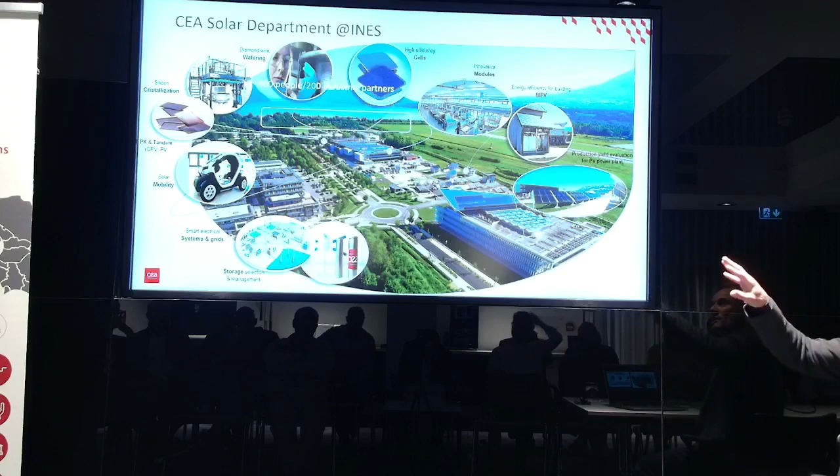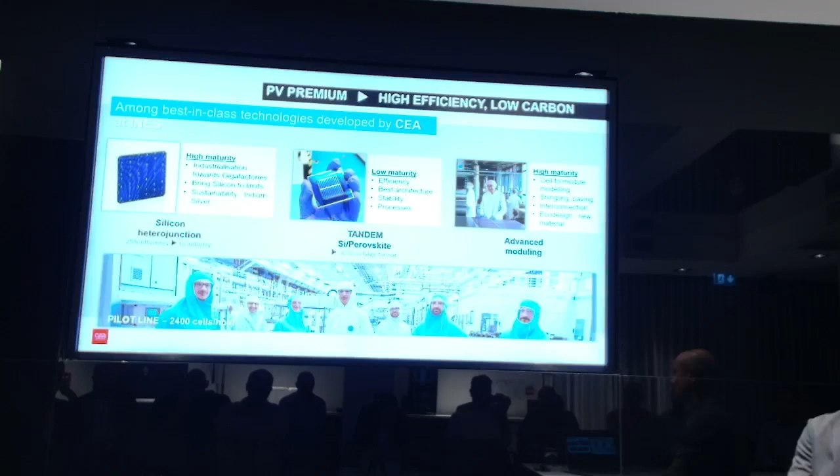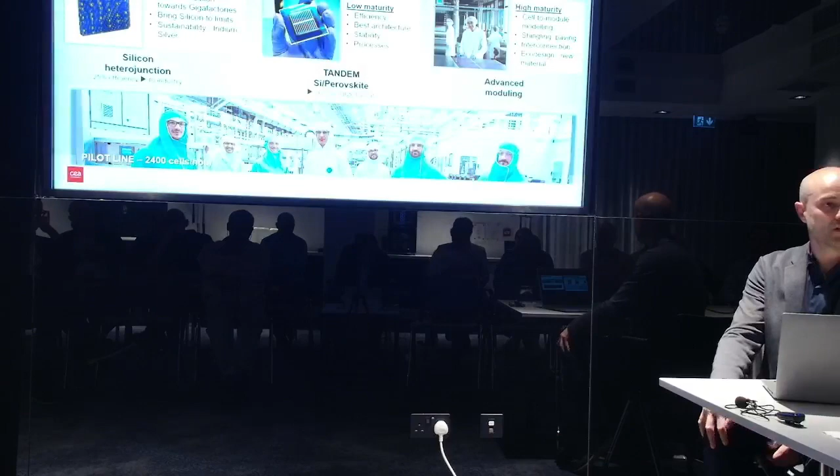So our first activity is to develop premium module technology with manufacturers for large PV systems. Here, quality, performance, and price are essential. One of our partners is Enel Green Power, Italian, which we support in its PV module manufacturing plant in Sicily, in Catania. It's an old ST Microelectronics site. There are big goals for manufacturing, trying to produce 5 gigawatts of modules in Sicily. The goal is to participate in the reindustrialization of Europe in the field of solar panel manufacturing.

Right now, 80% of modules come from China, and the rest from Asia. And we need a lot, so it's a big deal to do this. Right now, there is big dumping from China because we have a lot of modules in the harbor, so there are more modules, and there is an economic war between the United States and China, but who will make modules at which price? So it's difficult for all, so we have to close a little bit, maybe, the political things.

Today, the drop in cost and the durability of PV have always made it a very relevant technology for applications, like historically for satellites. There is no component in movement, and it is very light. So the point here is not the cost. I mean, always the cost, but less the cost. Very light, robust modules are the key. And here, the function rendered by the module is essential.

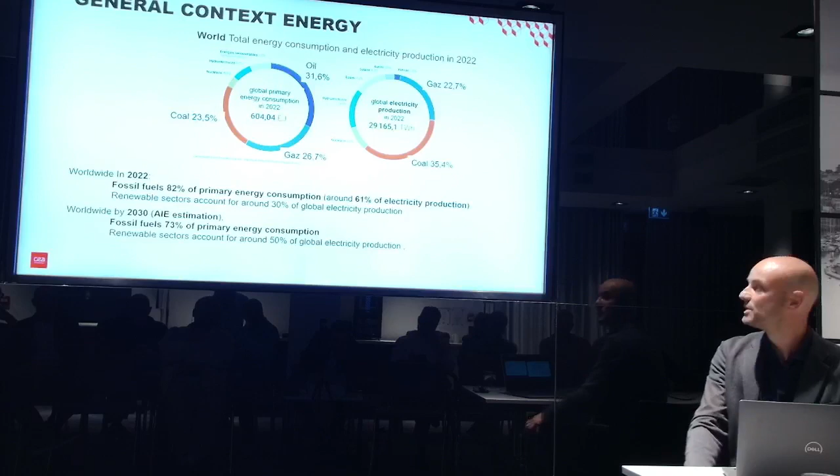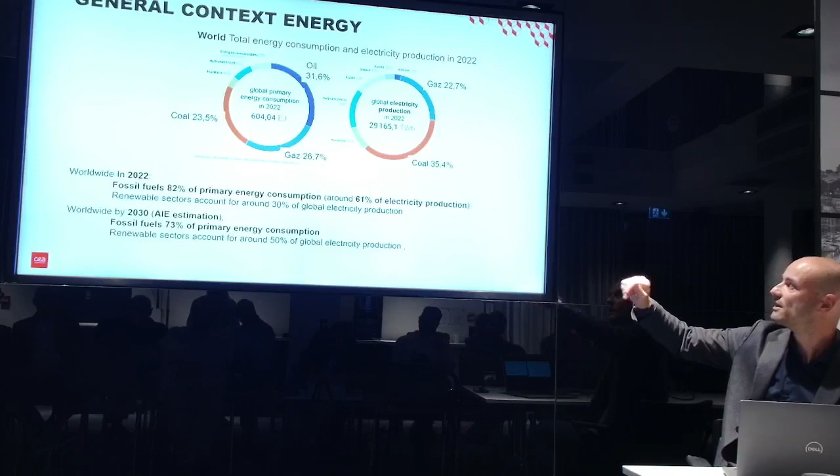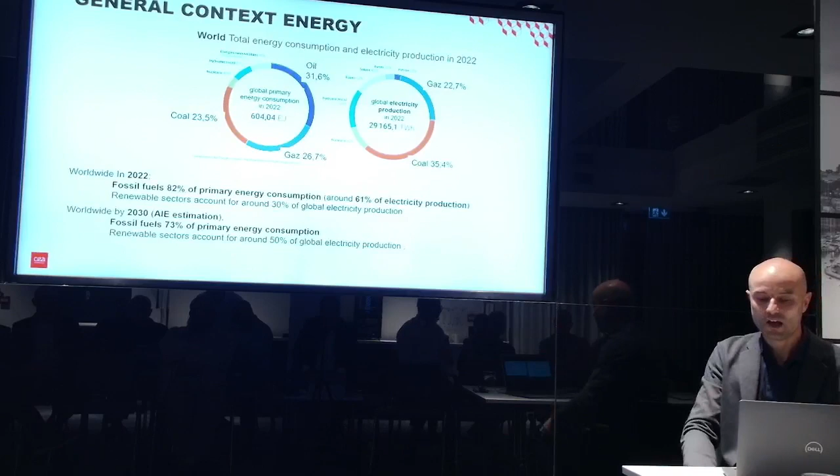So some general context. First of all, we know that fossil fuels are the main cause of global warming. It's known, and today they still represent the majority of our energy. On the left, you have all we need in energy, including transport. On the right, only electricity production. In both, it mainly comes from fossil fuels: coal, gas, and also petrol, oil for transport. So decarbonization requires reducing the use of these fossil fuels, and renewables will contribute enormously to this effort.

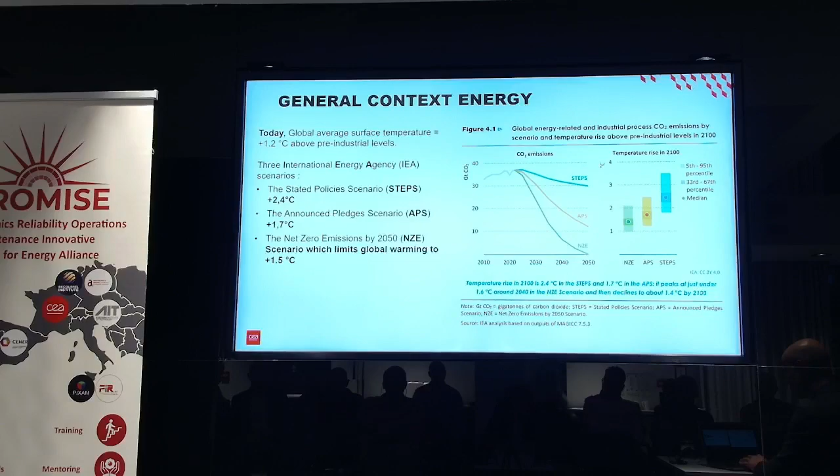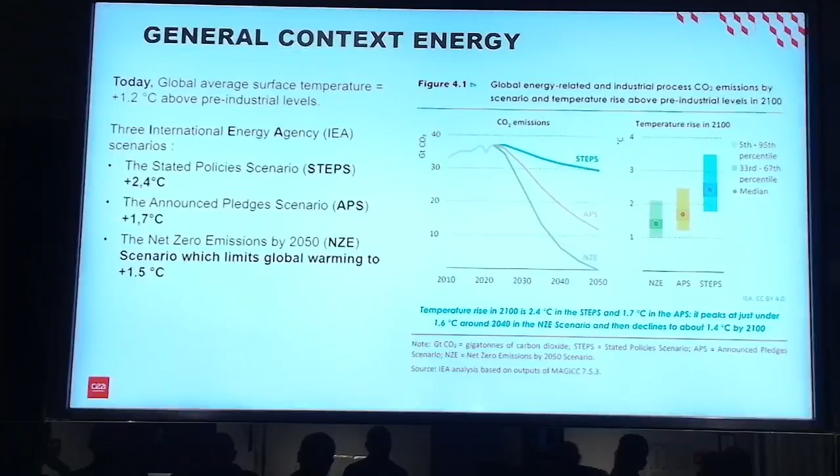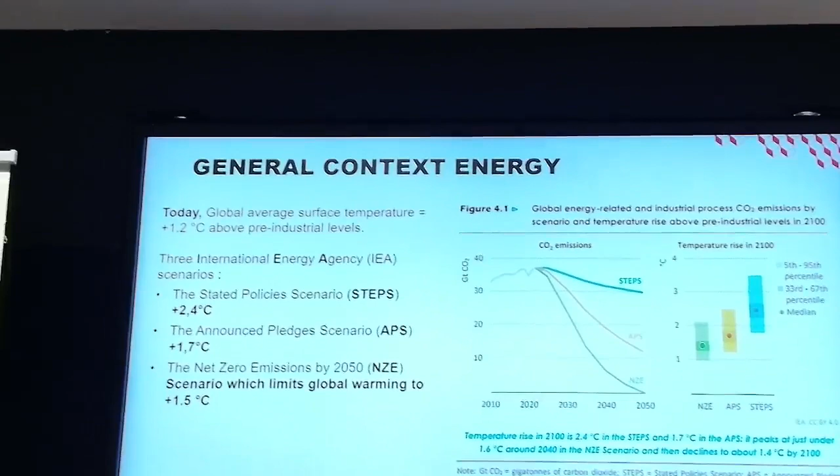So I would like to focus on this: the International Energy Agency proposes 3 scenarios depending on state declarations and objectives to limit temperature increase. First, the Stated Policies Scenario, STEPS, provides an outlook based on the latest policy settings, including energy, climate, and related industry policies. This scenario will limit warming in 2100 to 2.4 degrees.

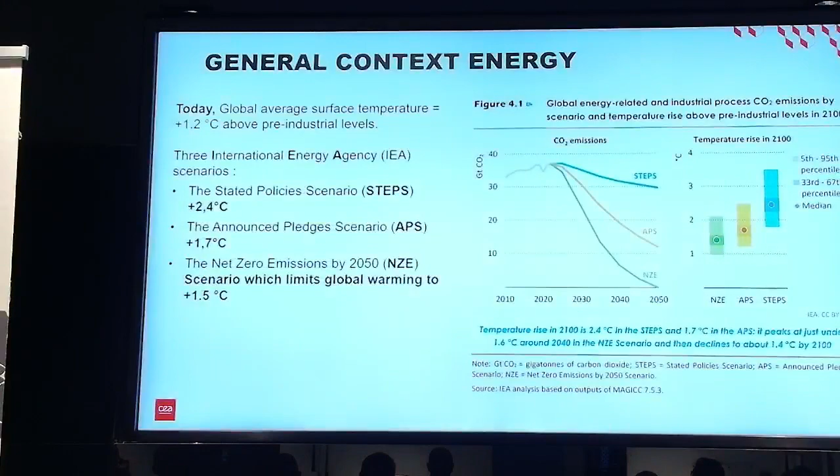The other scenario is the Announced Pledges Scenario, APS. It assumes all national energy and climate targets made by governments are met in full and on time. This scenario will limit warming in 2100 to 1.7 degrees. So it's not enough again, and much additional progress is still required to meet the objective of net zero emissions in 2050, which limits global warming to 1.5 degrees.

So here we can see it's 2.4 degrees, but there is some uncertainty. There are a lot of publications on the difference between 1.5 degrees, etc. It's huge.

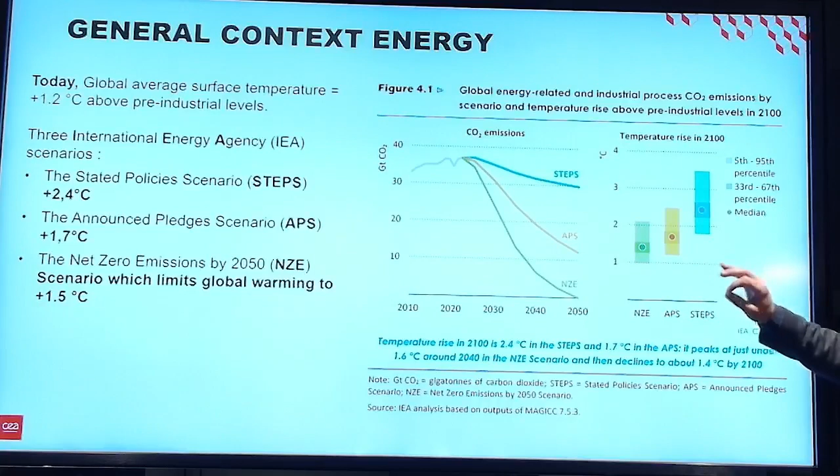In all scenarios proposed by the IEA, you have here the three scenarios, electricity consumption increases. We need more electricity. And why? Because we use it for transport. The STEPS scenario, the most conservative one, estimates that the number of electric vehicles will be multiplied by 2.5 in 2030. So we need more electricity for that. And of course, there is also a part linked to the increase of population and standard of living.

We see that in all scenarios proposed by the IEA, even the least ambitious, PV plays a major role. Here. So we know very well how to do the main part of the objective: ramping electrification, tripling renewable energy capacity.

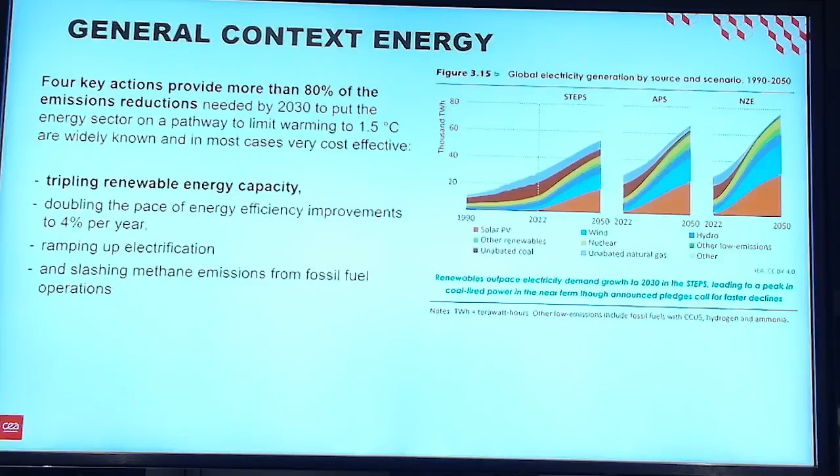Here, maybe, why is solar PV important? Solar PV is very modular. It can be manufactured in large plants with economies of scale, and you can deploy it in very small quantities. In PV, there is no scale effect. So you can address a range of applications from small to very large plants. It's very different from wind turbines, for instance.

Today, utility-scale solar PV is cheaper than the other options for new electricity generation. And rooftop solar is also growing faster due to rising electricity prices. And also the technology is mature right now, and we don't necessarily have time to wait 10, 20 years.

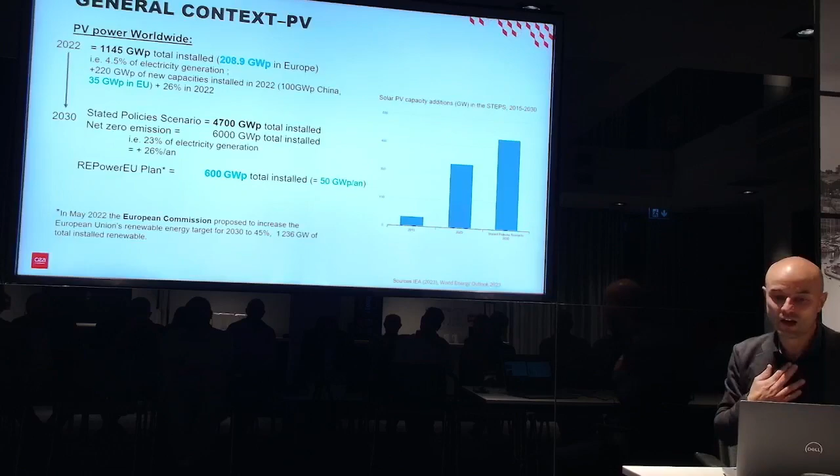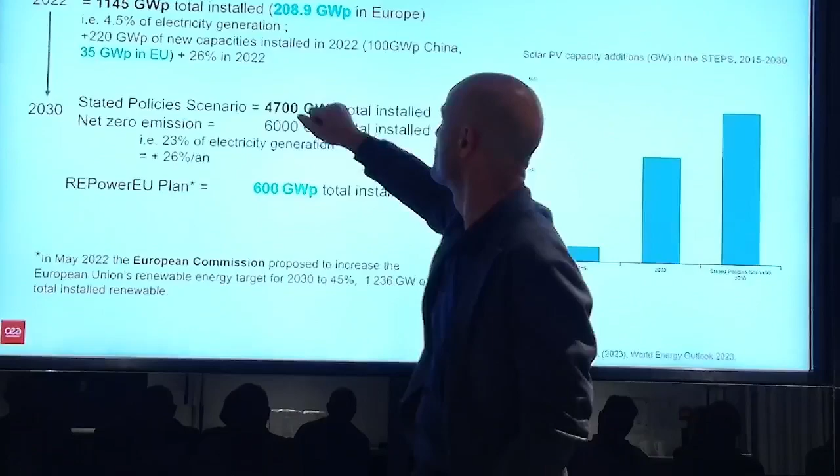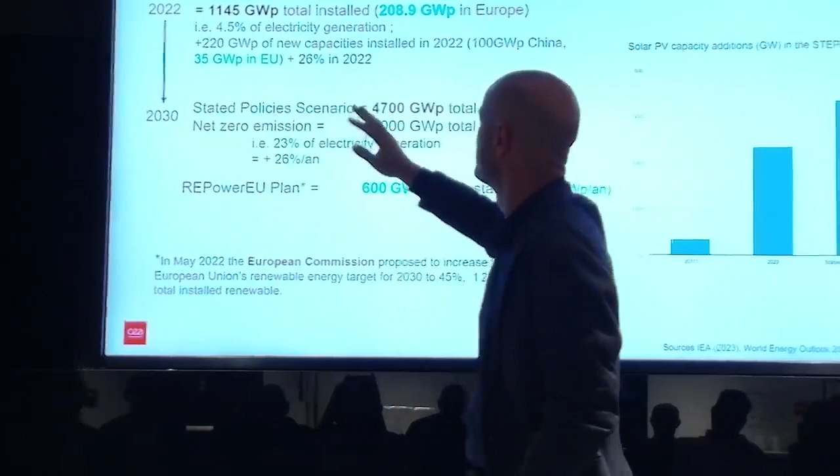So where we are today, some figures about 2022 and 2030. We have to go from there to there. And here it's conservative. In Europe, right now we are here, and in 2022 we added 35 gigawatts in Europe. The world is there. So we could achieve this objective, but it needs to be constant. Each year plus 26%.

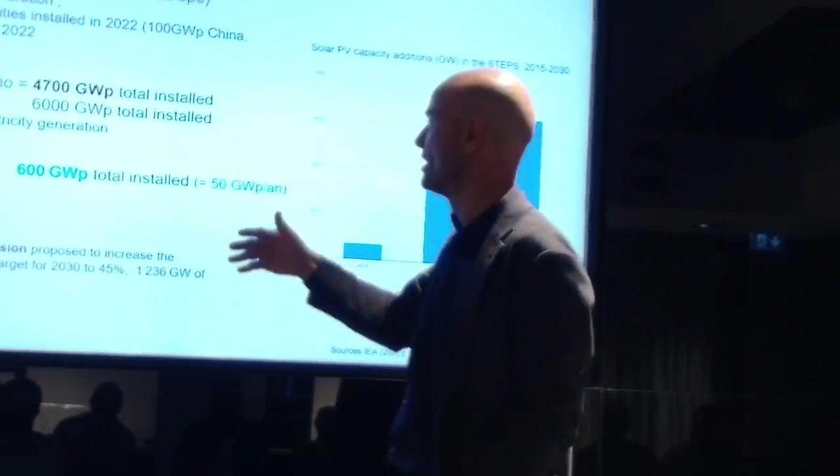So here in Europe, it's 50 gigawatts per year. This one is the conservative one. Each year we have to put in more and more. So we can do this, but there are some difficulties. I want to present this here.

And PV production is identified as an important lever of decarbonization, but the deployment of these technologies at different stages is important.

So renewables are said to contribute 80% of new power capacity to 2030 in the STEPS scenario, with solar PV alone accounting for half of the objective. In Europe, we have to pass from 200 to 600 in 7-8 years.

And the point is, solar energy is abundant on Earth, but its density is quite low. So therefore it requires a fairly large surface area. These huge surfaces must avoid impacting the environment as much as possible, and also human uses like agriculture.

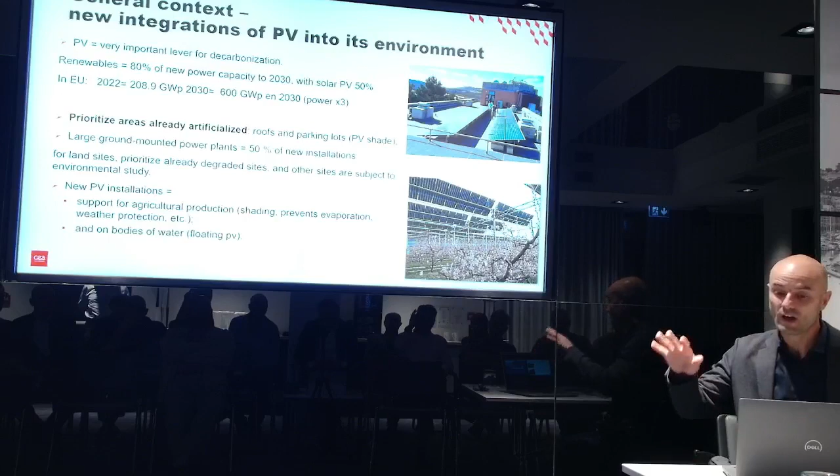And to do this, it's particularly important to prioritize surfaces that have already been artificialized, such as roofs, parking lots, PV shades, for instance. And for land sites, already degraded sites are prioritized, like quarries or things like that. And other sites are subject to environmental study.

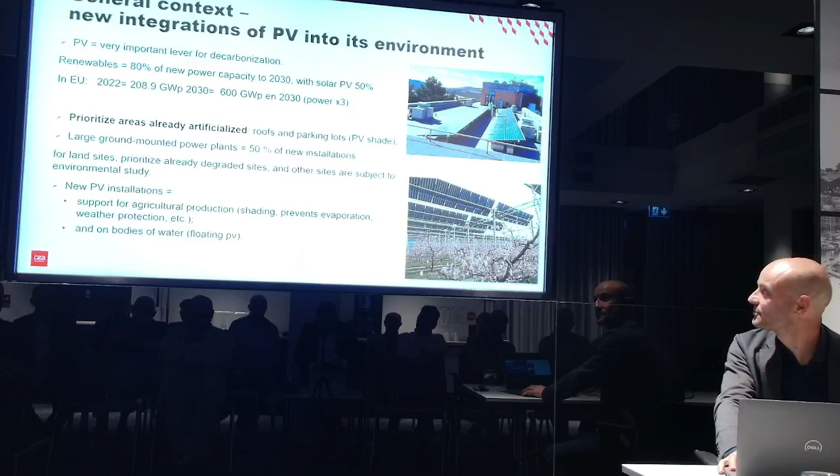More recently, new PV installations have also been developed, used as support for agricultural production, shading to avoid evaporation, weather protection, etc. There are a lot of demonstrators and tests in France or in Germany, and also on bodies of water: floating PV. You can see what's happening. Here is in Malta.

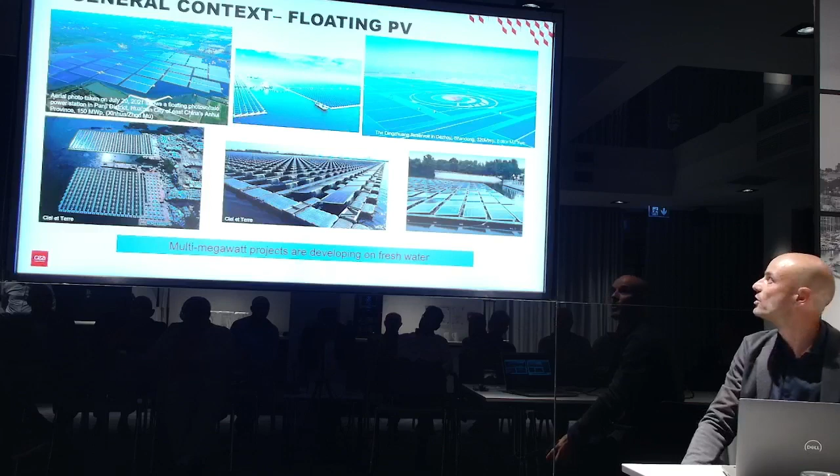So today, freshwater systems, like we can see, are mature, and huge power plants have already been built, mainly in Asia. Floating solar technology is now being developed over large areas with multi-megawatt systems. Here we can see a 300 megawatt peak floating system in China.

So this technology is quite new, and there is sometimes a lack of data on projects, and better knowledge or more precise data would make it possible to optimize operation and profitability of these projects. Here is an example of one project in France on a quarry lake. My laboratory is working with this partner to optimize the site production and integrate feedback on this upcoming floating power plant. So we have a lot of sensors in there, and we can work on different points of the system.

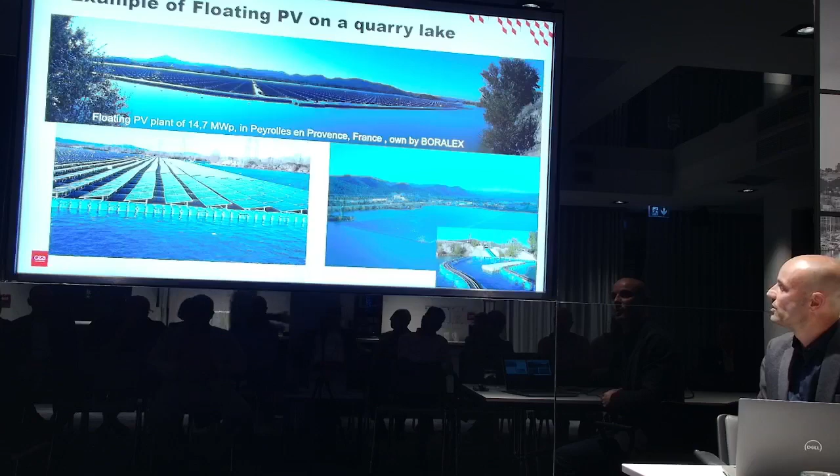So how does it look? A floating system is made up of visible parts, like a PV system on the ground, but also underwater parts. And the underwater part is essential to the durability of the system. Its proper sizing to adapt to site conditions is key, in particular the climate conditions like wind and waves, the type of soil, the operating conditions on the basin with the tidal range, and the impact on aquatic life.

So one point also is the cost of operation and maintenance. It's higher than on land.

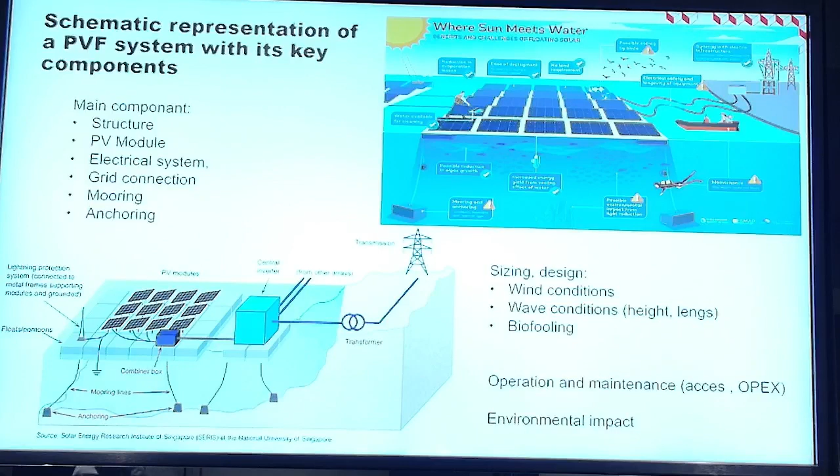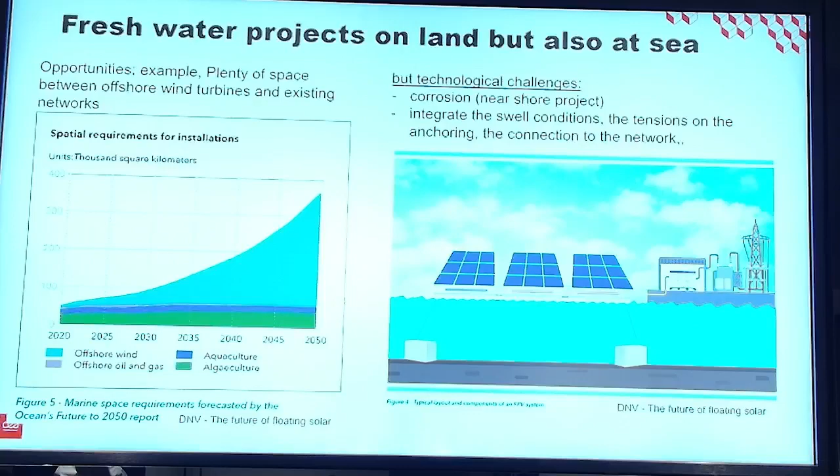What about floating at sea? So the sea represents a significant area. The coastal population is significant, and therefore so is energy consumption. So today, manufacturers are studying the opportunity to deploy floating systems between offshore wind turbines in the North Sea, for instance, because there are already facilities for grid connection, etc. But the technical challenges are significant. We speak about corrosion, integrating the swell conditions, tension on mooring, and connection to the network.

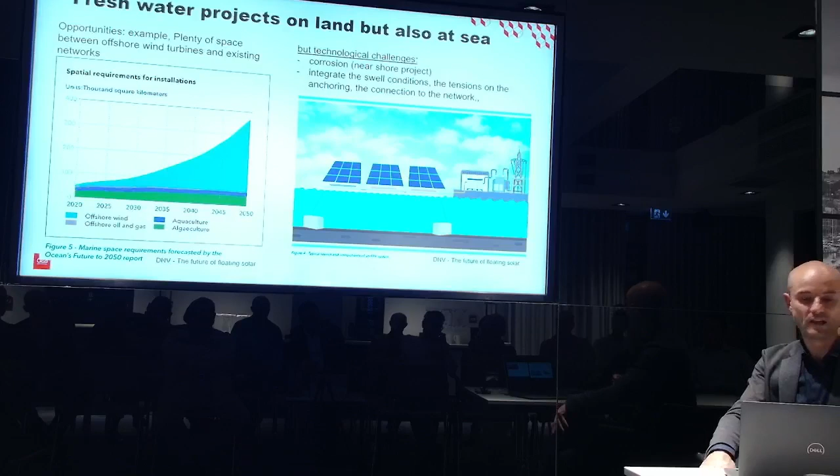That's why for 2 years, the first demonstrators of different technologies have been studied, and some have been deployed at sea. Initially, the projects and demonstrators concerned protected sites near shore and estuaries, to integrate first corrosion and little waves. And then some technologies are being studied for sites in the open sea. So I will introduce you to some of these technologies.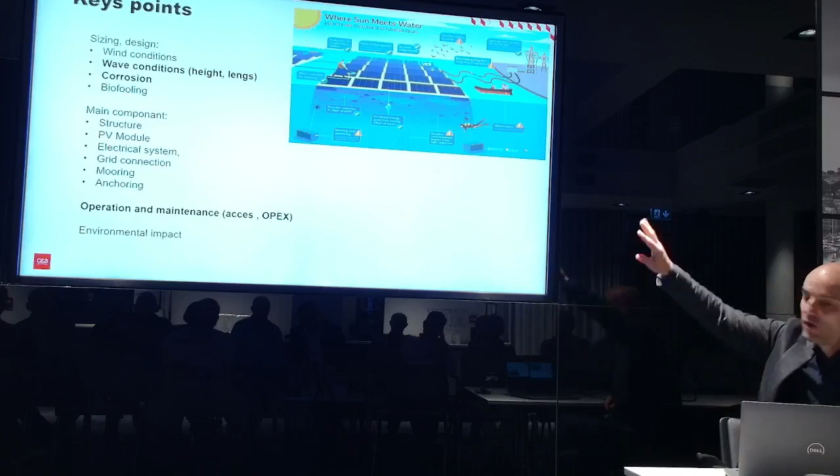So first, key points are similar as on freshwater sites, but with the addition of corrosion and stronger constraints on all points, particularly wave and wind conditions, but you also have grid connection, and all these points are difficult. Operation and maintenance is quite difficult also.

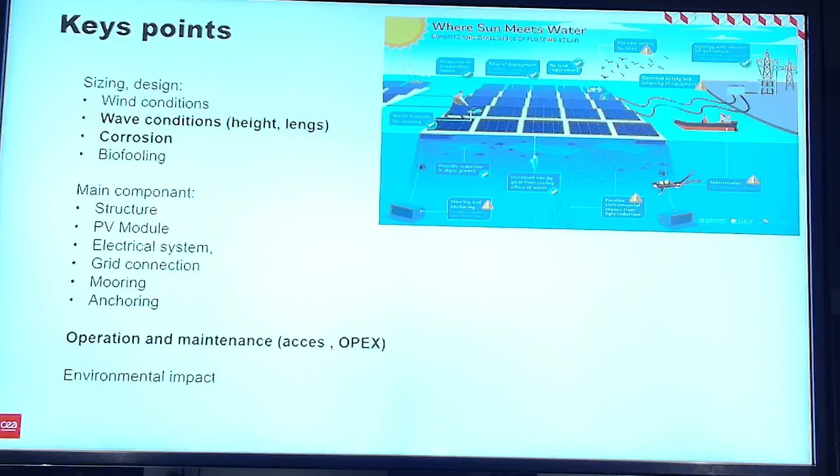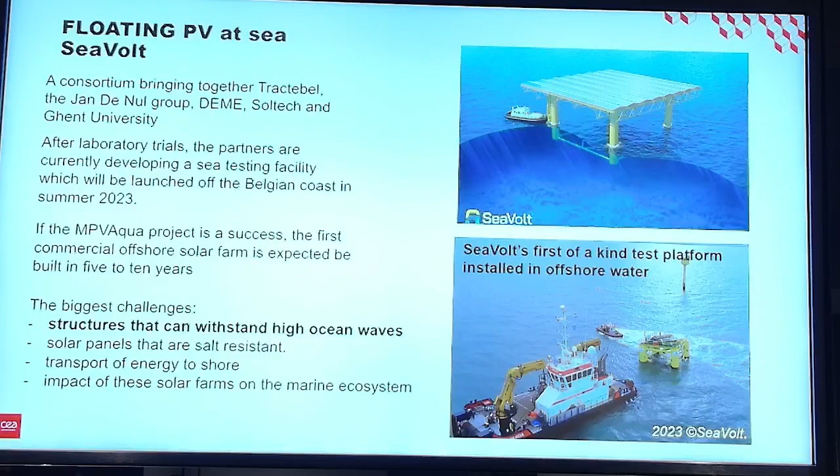Higher and higher. Here it's like an oil platform. So there is the principle of the platform. We are very high above the water. The first demonstrator has been installed. It seems to be suitable for big waves, but we have to wait for the results of this. But it could be a little bit expensive, but let's see.

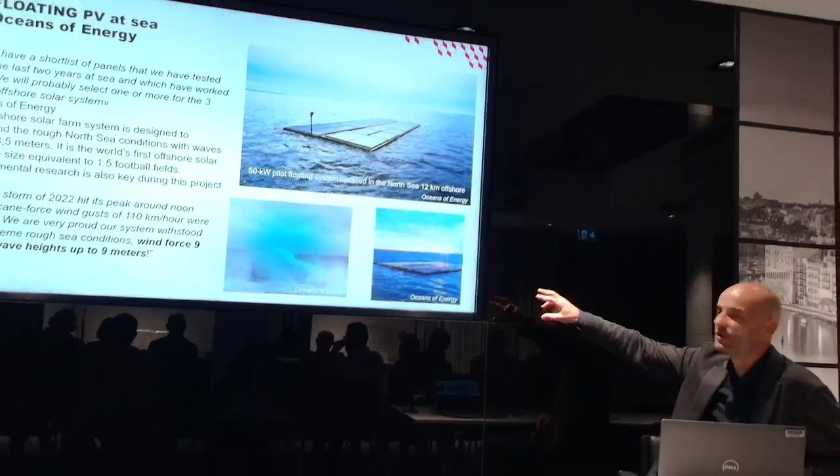At the opposite, here we stick to the water and follow the movement of the waves. And the company mentioned waves of 9 meters suffered by the demonstrator, located 12 kilometers from the coast. So here we are in the North Sea. So it could be interesting to understand how corrosion could impact the module here, in the sea.

There are other demonstrators. We have things like that. It looks like a fish farm. So this one is also a membrane on the water, so it follows the movement of the water. So there are a lot of tests in this way.

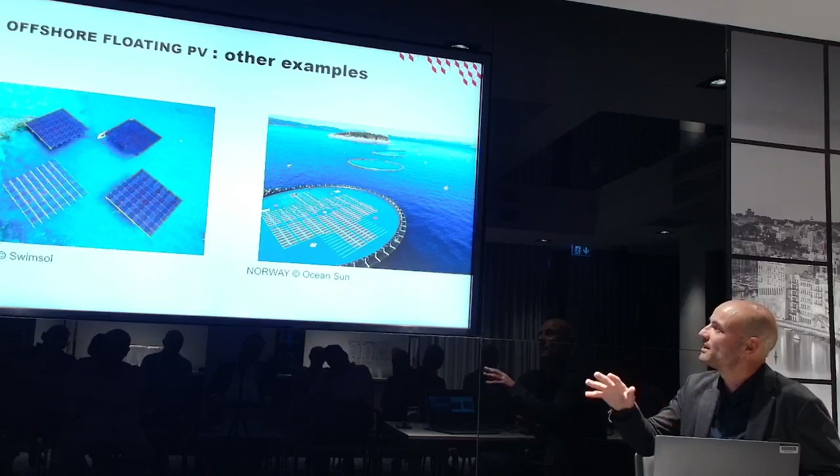So it depends. The sea is very large. You know that very well here. So open sea, high waves, statistics of big waves and big wind. So we can see how the demonstrator could give good or bad results.

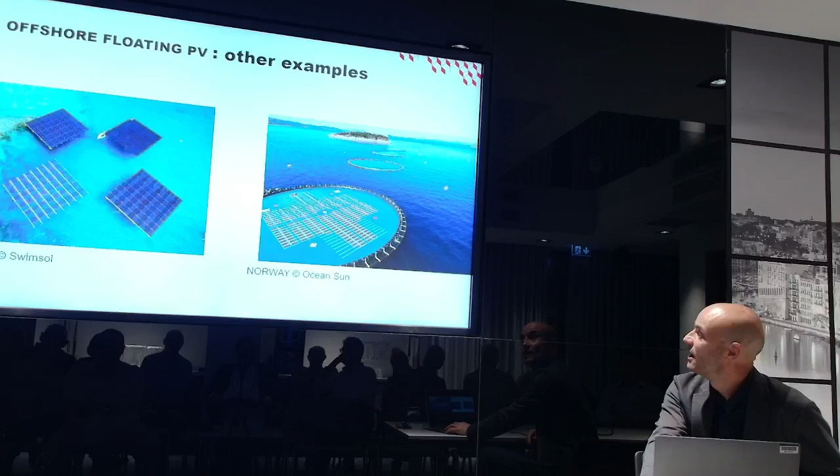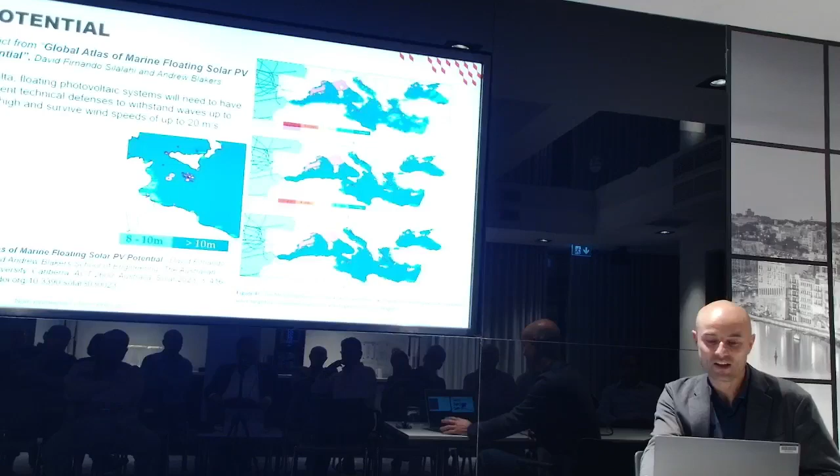I would like to focus a little bit on the Mediterranean Sea. It's not an easy place. So I found a first publication carried out by David Firnando Silalahi and Andrew Blakers of the School of Engineering of the Australian National University. They try to assess wave and wind conditions at sea around the world and quantify the potential for development of floating PV at sea.

So here the study looks at the worst conditions that a floating system will statistically face at sea. And here I zoomed in on the Mediterranean and on Malta. So first, I see that the conditions around Malta and in the Mediterranean in general are difficult, about 10-meter waves and 20 meters per second wind speed.

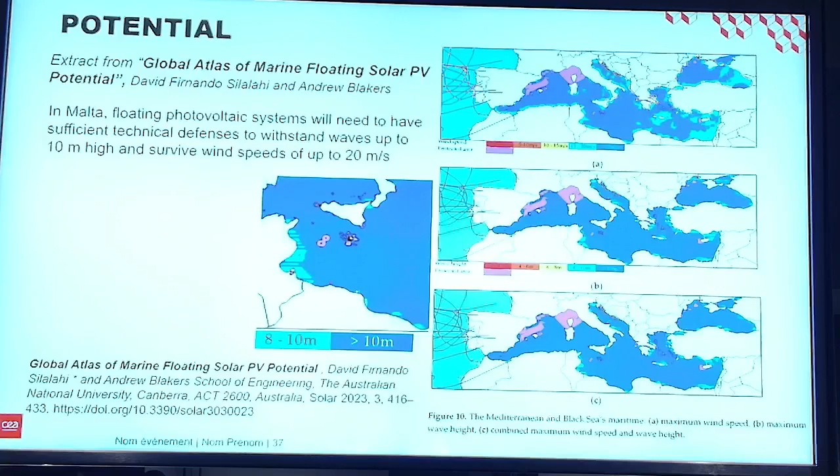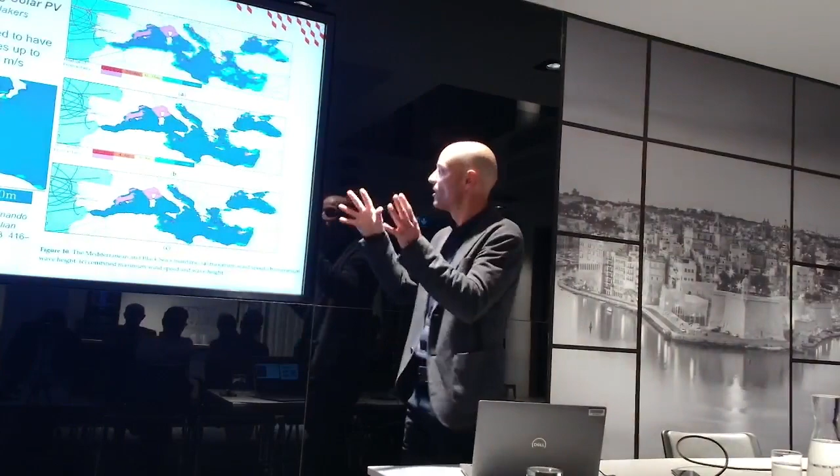So you know that, but of course the study is macro, so you could have some local conditions, local effects, estuaries, etc. We could find some good positions in the Greek islands here, but Malta is in the middle of the sea. It's a little bit difficult, but as you said previously, there is a lot of different technology, and maybe the oil platform design could be interesting, but we have to wait a little bit.

So I'm close to finished, but last but not least, there is a point we were to discuss with Brian, and I put a slide on PV in Malta. It's just to give a picture. It's very macro, but here we have some elements on PV energy in Malta, and some approximate figures to give an idea of the PV needed to produce the equivalent of Malta's annual consumption.

It's important to understand that it's not hourly equivalent production. It's total energy at the end of the day, over a year. So to have constant equivalent production and consumption, you need backup, you need a management system, etc. So it's an important point, but to give an idea, we have two possibilities to understand this. It's how much space we need.

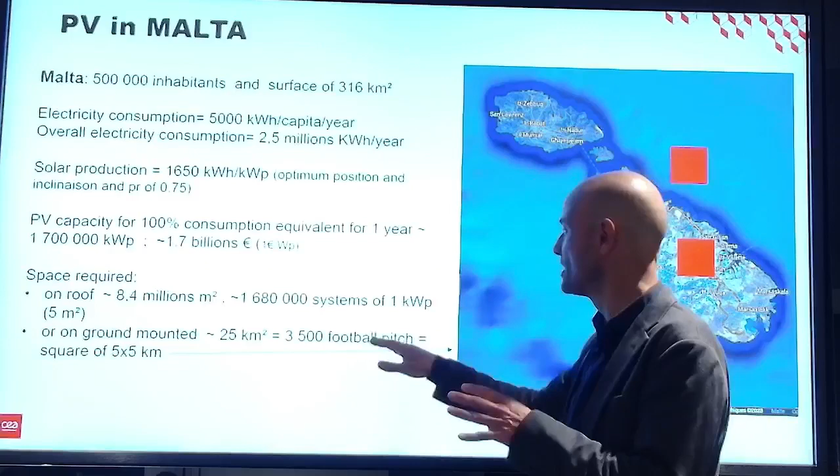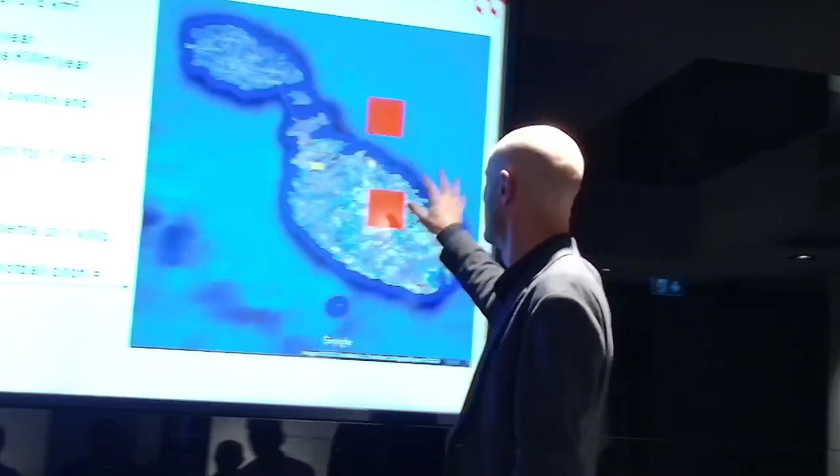Here we can see it's like 1,600,000 systems of 1 kilowatt peak, very small ones, 5 square meters, or ground-mounted systems. Ground-mounted systems need a little bit of space because you have shade. And it looks like 25 square kilometers, so a lot of football pitches. A square of 5 by 5, so we tried to show what it represents on the map. So it's a big floating PV system, or a big ground mount in Malta.

So here, this simple calculation shows that it will be necessary to find space to best integrate the PV. And now it's important first to maximize the value of private, industrial and public building roofs, and to install shade structures in parking lots.

It's important: this investment will reduce CO2 emissions, but also reduce electricity costs and provide visibility on price. Today, all big companies in the world invest a lot in PV systems because of the visibility on price. In France, SNCF, the biggest buyer of electricity in France because of the trains, invests a lot in PV. Google, etc. All the biggest consumers of electricity, because it gives visibility on the price.

In fact, and I will conclude on this, solar energy is free and the price is fixed. So this is a good investment for the future. And to finish, here is a site that we monitor in Malta as part of the Promise project, supporting training and skills transfer. So thank you for listening.

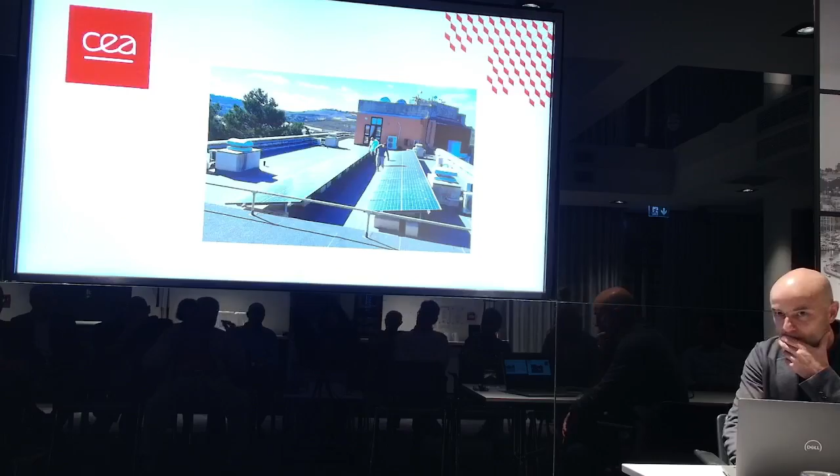If I'm not mistaken, I stand to be corrected, obviously. In your earlier presentation, what I understood is that on the ones already installed, the wave limitation is 1.5 meters wave height for safe operation. Is that correct? Because then you showed us platforms like oil rigs that are being experimented. But today, is there still that limitation of 1.5 meter wave height?

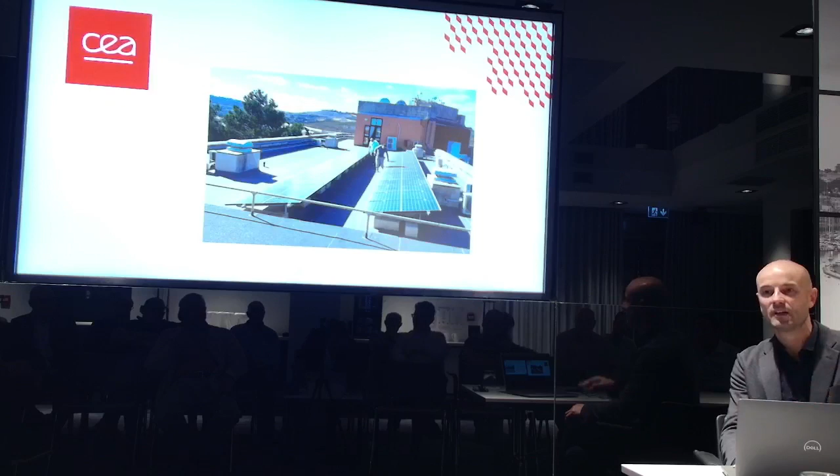It's difficult to have a precise point on this, but it's close to 1-2 meters. It's very low now. Yes. But the main constraint for floating solar now is inland, and the main point is the wind. Inland it's the wind, and it creates waves, sure, but it's the wind and the fact that we are on big reservoirs, storage of water, with movement in the level and margin, and we have to organize the mooring and anchoring to adapt to these different water levels, linked to the wind. The wind could create waves, but it's mainly the wind that's the problem.

And when we go to sea, waves arrive as well, etc. So the first demonstrator I mentioned, the bigger one, is 1 megawatt, so it became bigger. It's on an estuary, a protected area. So I don't know exactly the level of swell, but today all the biggest projects at sea are near wind turbines. They want to go there because all the infrastructure is already there. So Dutch and German companies study this a lot. Thanks.

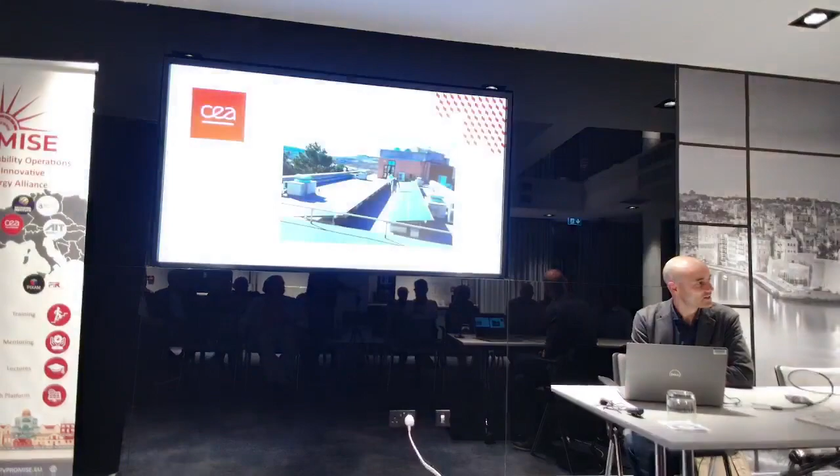Any questions? You know, everyone has to compare costs because finally, I think that's what makes the floating PV system viable or not. Definitely, it's much more costly to install PV on the water rather than on the roof of a house. When you are on the water, you have large scale solar, so you have the scale effect, so you cannot compare exactly. You can compare large scale ground mounted systems with floating systems on fresh water. This we can compare, and we know there is maybe 10-20% more in capex. Operation and maintenance is also 20-30% more.

It's just because prima facie it looks like it will be much more expensive, especially from the maintenance point of view. Also 30% seems to me a little bit low compared to maintenance on land.

Today we speak about 20 or 30% more operation and maintenance, but sometimes it could be very difficult because we also have birds. Some technology is sometimes not very well designed, with cables near the water, so there is a lot of discussion among owners about which technology to buy, because some was very near the water, and now they try to go a little higher and organize the electricity cables because of movement. We see a lot of problems with electrical fires on some of them. But now there is good feedback, though it's not like ground-mounted systems. There is optimization of performance and operation and maintenance to do.

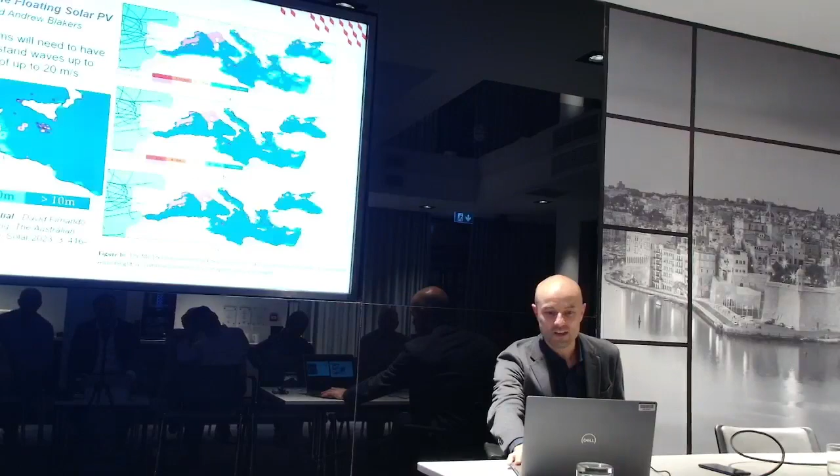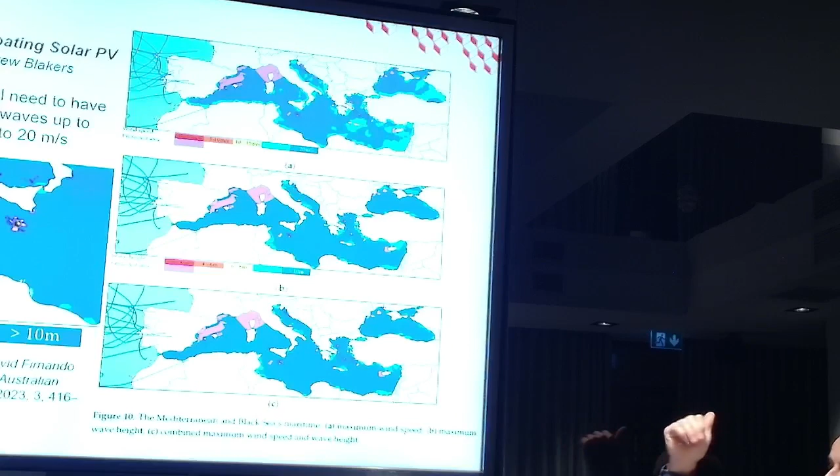It's from 2023, you have a reference here. So here it's only Mediterranean, but they made a study worldwide. And the good part is the main region is Asia. Asia is very interesting, but there is hurricane risk. So we don't have hurricanes here, so maybe in the future, but right now there isn't.

But we have some, like offshore wind turbines. Here we have some tests near Marseille, we have 3, it's not a lot. So maybe it's the experience of the Dutch.

Final question: is there a comparison? Because now there's a lot of talk of floating, both solar and floating wind. Yes, a comparison in relation to the cost of both, because both of them have similar challenges, and capex for them, they're both very expensive to do.

Everything that comes with it. So the wind is better at sea because there's no rugosity, I mean the wind stays low and it's very laminar. In the Mediterranean sometimes it's difficult, but the wind comes from the earth — in Marseille the wind is very turbulent, there are gusts everywhere. But in all the west part of Europe, the wind comes from the ocean, it's very laminar, etc. And in wind turbines there's a scale effect: the larger the wind turbine is, the more efficient it is.

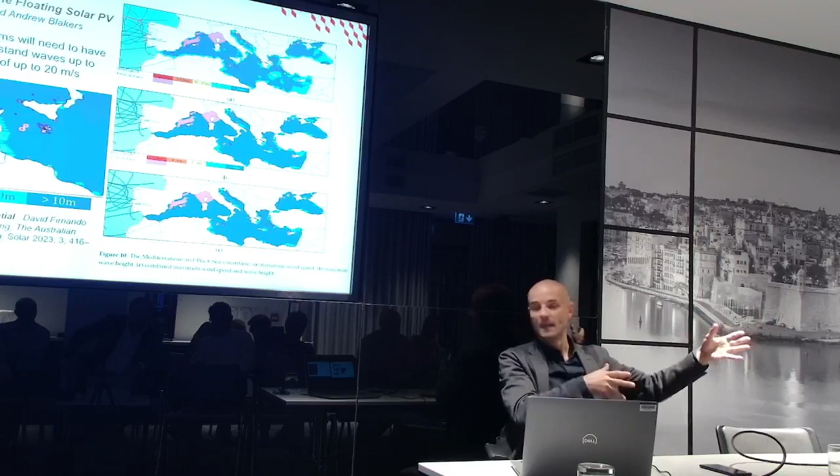Today, industry says, 'The price is very high, so I want to buy a PV module so I can have visibility in part of my electricity, and I will put this near the building. But maybe in 5-10 years I will need this space to store, I don't know.' So today some producers who develop projects propose very short contracts, maybe 10 years, and say, 'I put a system like concrete, very easy to install and remove, and I propose a contract of 10 years.' So 10 years is easier, because a ground-mounted contract is 20-30 years.

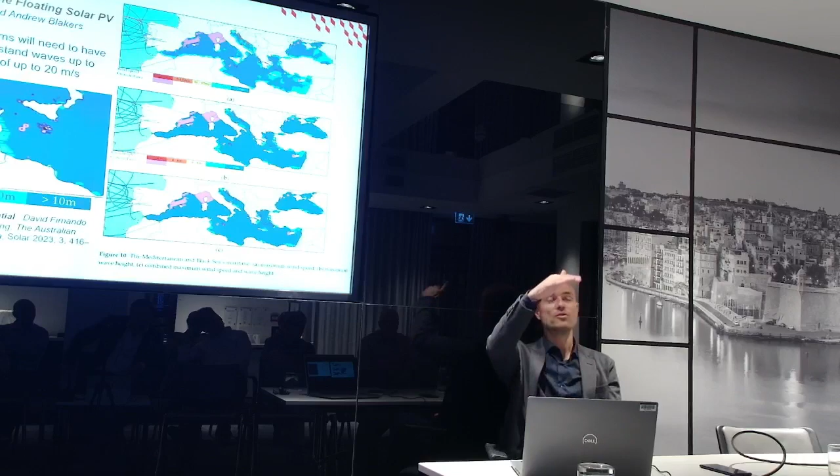30 years is difficult also for parking sometimes, at airports. An airport in Marseille said to me, 'It's nice, but if I need space, maybe I need to change the parking layout. So if there is shade, I have to remove it.' So I know that, but there, some contracts now make it possible. So we try to find solutions, and you also have to manage the shadow. If you have a system and tomorrow you can build 4 floors, and urbanistic rules permit 7 floors in front of you to the south or east, it's a problem. We have those issues - there is not one solution, but it was a reason for land reclamation.

Agrivoltaics is also a trend in France now. Everybody wants to understand this, and the government is cautious - we have a bad experience with sugar.

You make sugar, you have big beetroot - it's red - and we can use it to make oil. So you replace ground used for agriculture to make oil instead. It's not possible, you have to maintain it. So they study how much PV you can put and link it to the agricultural production below, and make sure the owner of the ground doesn't say 'I stop producing and go only with PV.' So there is discussion between agricultural research, government, etc. But we will find a solution - maybe 30% of the ground could be covered by PV, and it's interesting to avoid evaporation.

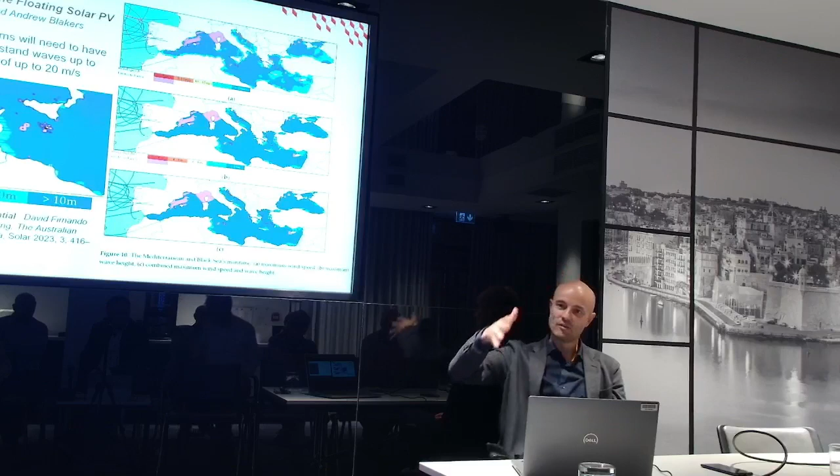Question: talking about the Mediterranean, you take wave height and wind speed into account, but not the period of the wave. Yes, there is the length of the wave - the Mediterranean frequency is much shorter. Yes, this type of study exists for different technologies, they take it into account. Here it's more global. I think they took just the key parameters, but afterward we have to understand the length and frequency of the waves. That's why sometimes a system that follows the movement would be interesting, but it's maybe not very good for PV modules.

Question: out of curiosity, in France what is the primary source of power generation - is it still nuclear? Yes. What percentage of the total? 68%... 78%. And solar, how much at present? Solar is 2-3%, it's nothing. But we have big objectives to develop it.

So you have no more coal-fired or oil-fired power stations? There is still some coal, but just for backup, for peak demand. We have hydropower, but hydropower has had a lot of problems with water for the last 2 years, so it's also difficult. Nuclear power has problems of availability because of maintenance, etc. We are in transition, and trying to extend the time of exploitation of plants.

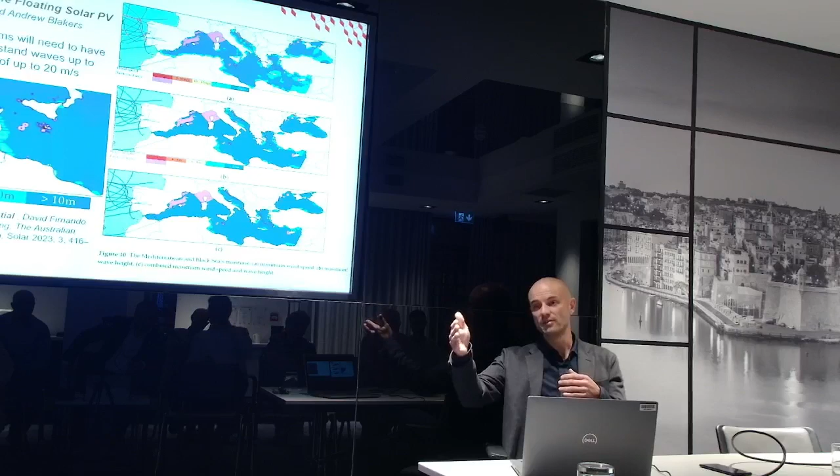At the beginning, nuclear power plants were made in the 80s and 90s, in France and elsewhere, and they were made for 40 years. That's now, so we have to decide. We have a lot of studies on security to prolong it, to go to 50 years and 60 years, because other technologies are not ready.

The problem today is that nuclear technology research was stopped very early, so now we are on the old technology. I mean, it's like a submarine from 1957, 1968, American submarine technology. We need water all the time, so when water stops, if you're on a submarine it's okay, but when you're on ground, you need security.

So we need research, and our researchers said if we want to find another technology, not SMR - SMR is a small reactor, but the technology is the same - we need maybe 20 years, and it could be interesting, but the problem of security is very important for EPR now.

We have a project in France with a lot of exceeding time and price. We have a project in Finland with always tests, not in exploitation. And in China, I think the third one is stopped, I don't know exactly why. So there are a lot of possible demonstrators, but from demonstrator to exploitation takes time, and we lost our time. I don't know exactly why - it's politics between Germany and France. It's complex.

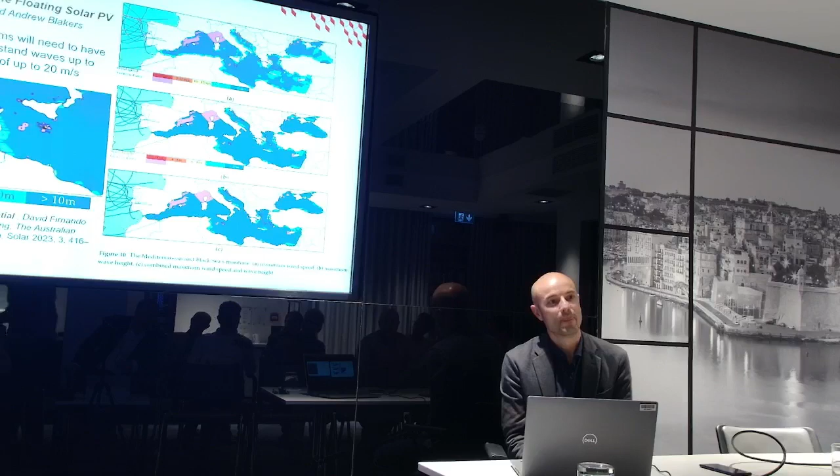Thank you for the presentation, first of all. Do you recommend any particular type of PV system for panels at sea? Earlier in the slide, you referred to perovskite.

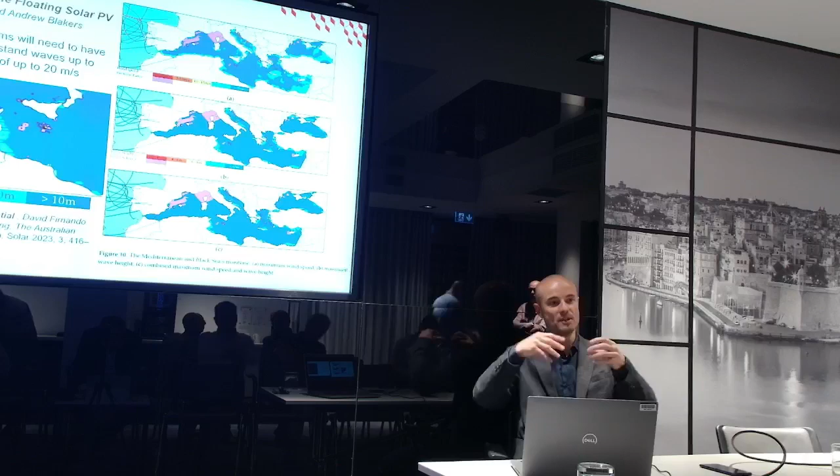Ah yes. So there is research on PV. Right now, when you build a big farm, a big combined manufacturer of PV modules, it's a lot of investment, and you have to understand which technology is deployed right now and in 5 years, etc. So there is a lot of new technology possible to increase the yield of the solar panel. We always need to increase the yield.

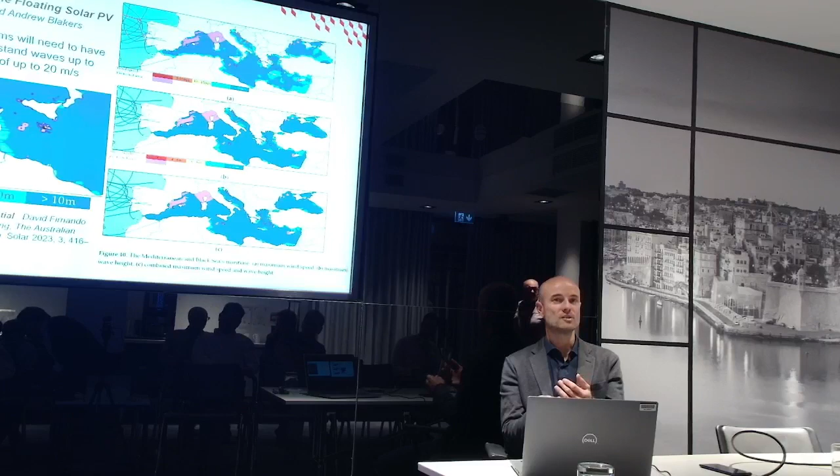And we also need to use less materials like copper, and silver too - it means if we produce all the modules we need, we will use all the silver in the world, maybe. So we have a lot of challenges in the performance of the material and all the integration, electric integration also.

So we work on different technologies, but also we work on how to transfer it into manufacturing. It's a very huge company.

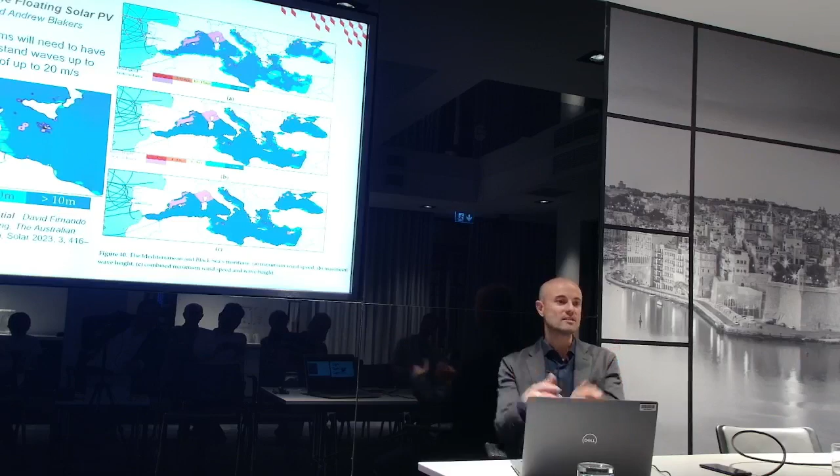Your first question was, what do you see perovskite as an emerging technology? Yes, we combine technology now with other silicon and perovskite, we call it tandem. So it could be the next technology - not so far, well, I don't know, maybe I'm not an expert on material, but maybe 5, 10 years. I'm not sure, it's very interesting.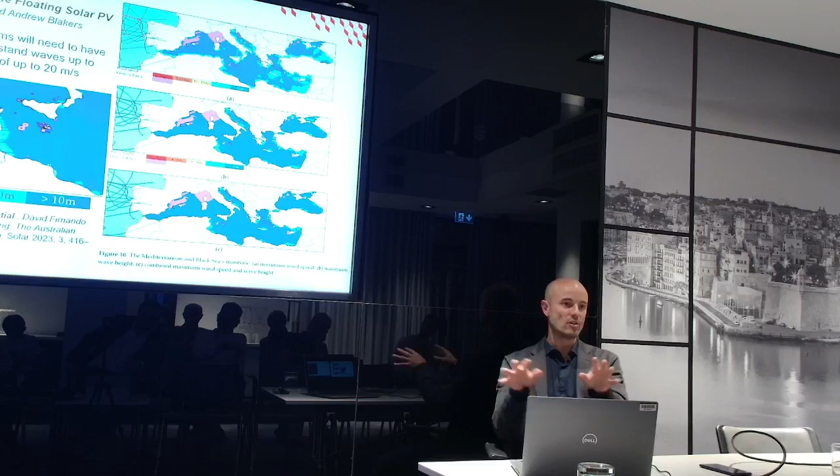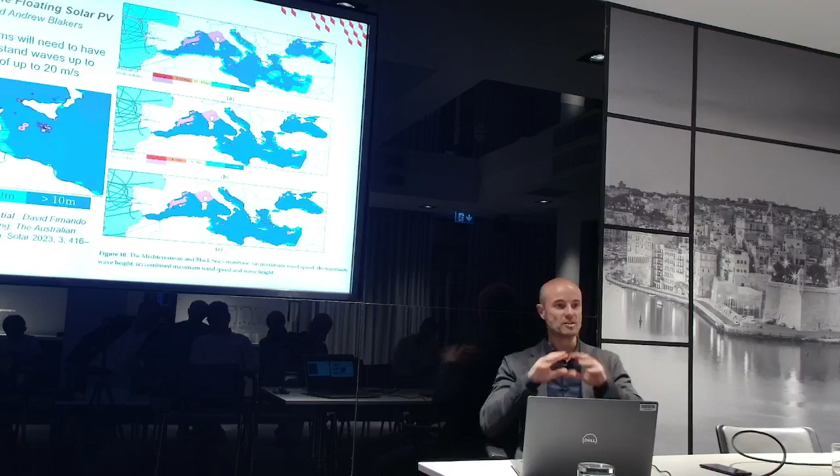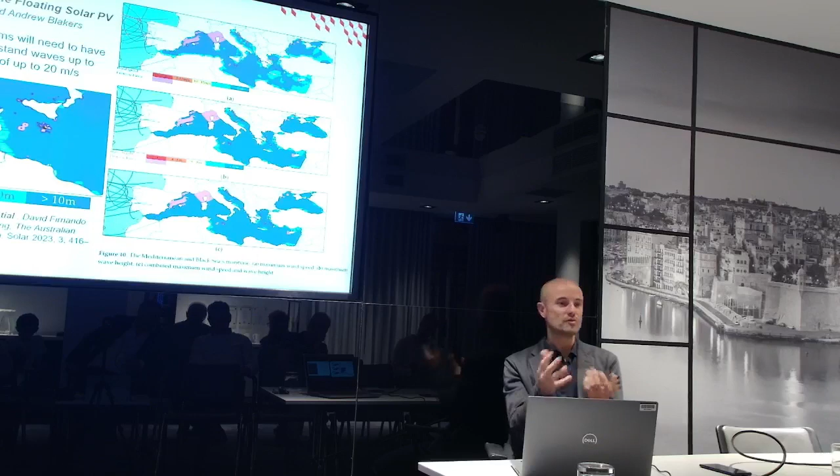Everybody works on this. And you asked about PV at sea - we test different modules, but the point is the encapsulation, and how water can go inside or not. We have in the laboratory a climatic chamber to test this, and we can double-glass the module. It's very nice for that, but it's quite heavy also. But there's good technology for that - we have to test, we test some modules.